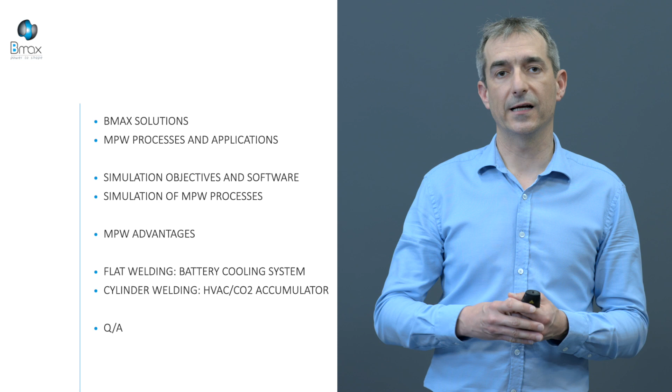We conclude with detailed case studies. The first one is for a battery cooling system, it's a flat welding, and the second one is cylinder welding for HVAC applications.

Bmax has developed innovative processes and provides equipment and services using high pulse power, HPP, for industrial applications. Basically, the product of Bmax is a pulse power generator. This generator can be plugged into several devices, a coil or electrode system in water, to perform any industrial manufacturing applications like forming, welding, assembling, and calibrating. In this webinar, we'll speak about only welding.

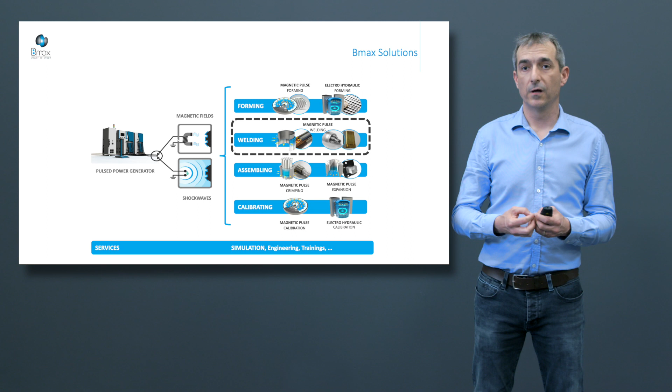There are two business cases at Bmax. The first is to produce a component or assembly, and the second is to deliver an HPP system. To complete its offer, Bmax has services including training, engineering, and simulation. The Bmax solution has a very small environmental footprint. They are compact, ultra-low energy consumption, there is no chemical emission and no heating, and it's quick and repeatable.

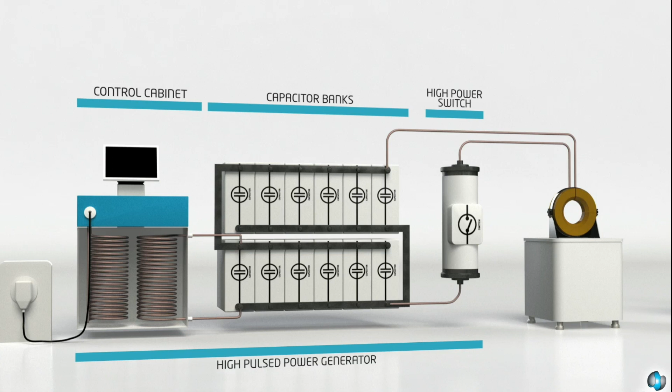Now, a presentation of an MPW system. There is a high pulse power generator, including a control cabinet, a capacitor bank, and a trigger named a switch. We plug this generator onto the coil. It's the final stage of the system.

In this coil, we put the workpiece, a tube and a cap in this case. Thanks to the control cabinet, we manage the energy level, the voltage for example, and we load the capacitor bank slowly with low power. Afterward, we release all this electrical energy thanks to the switch. We deliver this energy very fast into the coil. The current goes through the coil and creates a magnetic field.

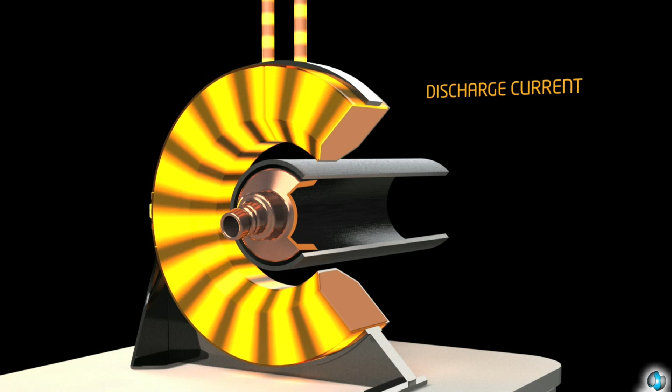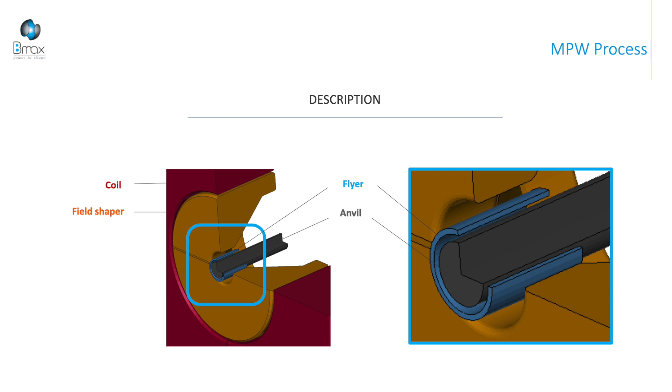To be clear in the explanation, I have to introduce a few definitions: the coil, the flyer, and the anvil first. The coil is plugged directly to the generator. It's the electrical device which carries the discharge current from the generator. It's the inductor, and we create Lorentz force on the flyer.

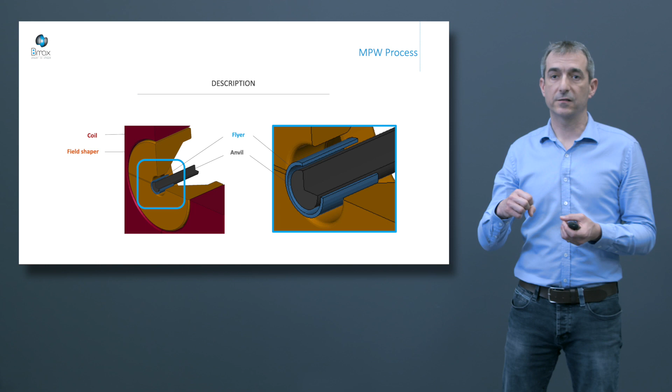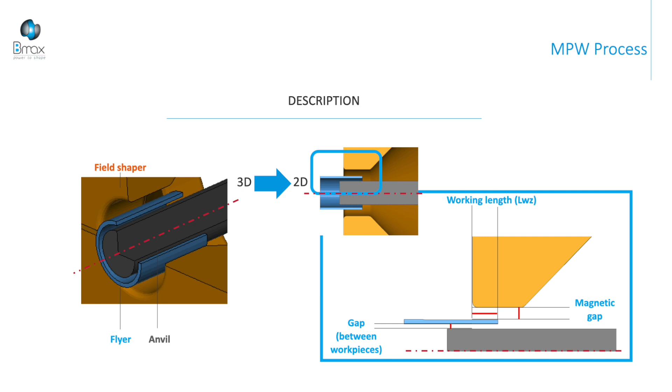It's a workpiece with a moving part, and this flyer impacts a target, and this target is the anvil or the parent part. From the 3D CAD model, we can perform a cutting view and a 2D section. In this 2D section, we can analyze three critical, more important parameters: the working length, which is the overlap between the coil and the flyer; the magnetic gap, which is the clearance between the coil and the flyer; and the gap, which is the clearance between all the workpieces, flyer and parent part.

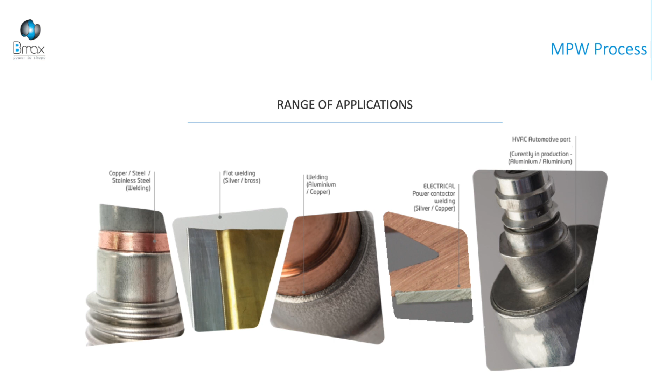The range of applications at Bmax is quite large. We can address automotive, energy, and aerospace applications. In automotive, we can work on HVAC, drive shafts, and filters. We are able to weld complex shapes and dissimilar materials like aluminum and copper, aluminum and steel, silver and copper, and so on.

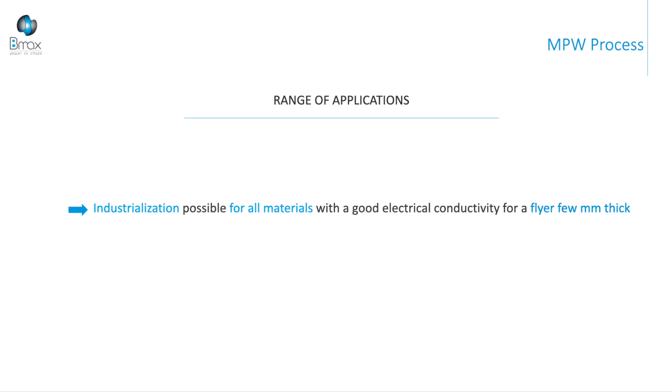The industrialization of MPW is easier for all materials if the flyer is a good electrical conductor and a few millimeters thick. It's a good condition to develop an industrialized system easily.

Simulations. It's a complex process. That's why we use simulation. The first objective of simulation is to understand physics, understand what happened, and to perform any sensitivity studies. The second point is to design and optimize components and processes. By this way, we're able to save time and cost compared with development of a brand new prototype, for example.

We use LS-DYNA software. It's a commercial code, and we developed a lot of special capabilities for data processing and user subroutines to address the specifically MPW processes. We have a service of simulations, and you can take a look on the first webinar. It's an overview of simulation capabilities and applications, and how we use simulation for all the Bmax processes. And it's a uniqueness in Bmax: material characterization, data processing, expertise in HPP, in forming, and in simulations.

How we use simulations to address MPW processes. All processes in Bmax are dynamic and multiphysics. Dynamic because all the process is done in few microseconds. And multiphysics because all the process consists of converting electrical energy into mechanical energy. For magnetic pulse applications, crimping, welding, or forming, we use a coil to create Lorentz force. So in the simulation software, we have to activate special capability, and we have to be dynamic and multiphysics.

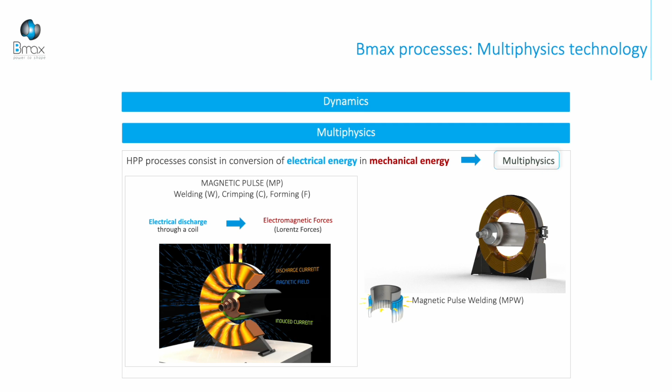Basically, we perform a coupling between the mechanical solver, which calculates stress, strain, and the displacement in the conductor in dynamics, and we plug this solver with the electromagnetic module, which updates all the electromagnetic field, like magnetic field, electric field, and the current density, and the Lorentz force at the end. And this Lorentz force is directly used by the mechanical solver to calculate accurately the loading.

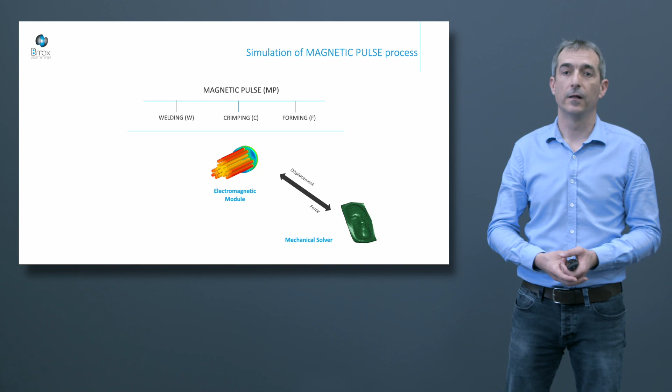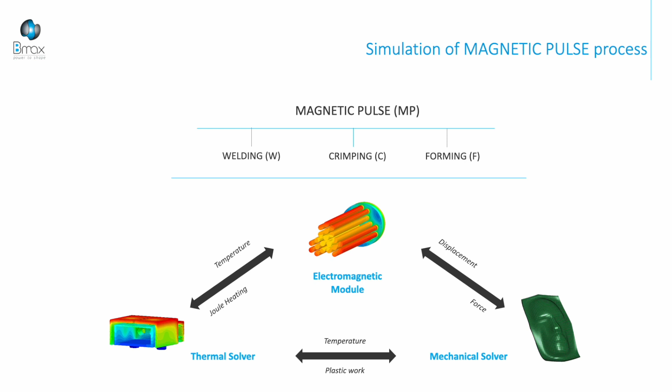In the metallic part, when we have a current induced, for example, we create heating. And we have to perform a coupling between the thermal solver and the electromagnetic module, for example, to update the electrical conductivity. Because when the temperature increases, we have a decreasing of the Lorentz force and the efficiency of the process. That's why we perform these three couplings between the three solvers.

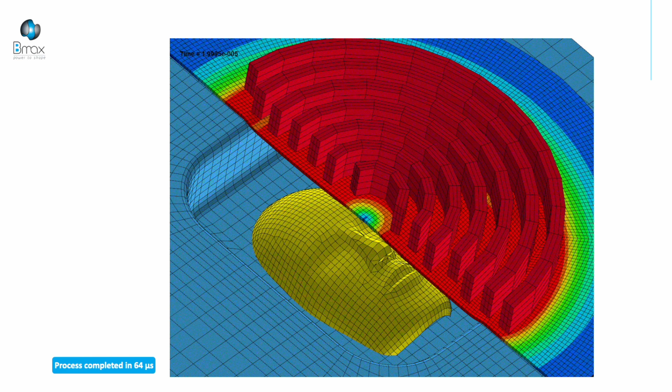In this example, we applied the pulse current directly on the coil, the red component on the screen, and the coil creates a magnetic field and pushes the flat blank to the bottom of the die. The fringe, the color, represents the maximum of Lorentz force. All the process is done in 64 microseconds. As you can see, the maximum of Lorentz force depends on space and time. That's why we perform this kind of coupling between all these solvers.

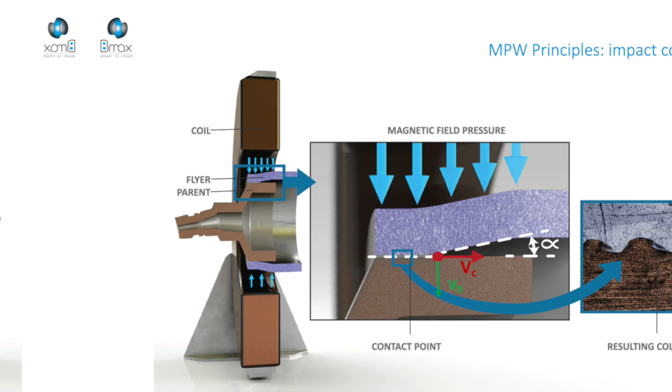MPW principles. In history, we defined the welding window for explosive welding applications. We use two main parameters: the angle at the impact and the contact closing velocity. The angle is defined by the clearance between the two components, and the contact closing speed depends on the explosive material properties. The sound speed of detonation is constant, and it's exactly this speed.

In magnetic pulse applications, in magnetic pulse welding, this velocity is not constant. That's why we use the component of the speed normal to the interface, to the contact surface, VR, shown in green on this screen. By this way, we are able to define magnetic welding windows, the condition required to expect welding. The drawing represents these parameters: angle, speed, and normal speed to the interface.

The first limit is the yellow straight line. We have to reach high speed to activate hydrodynamic behavior in the material. After this limit, when we reach this speed, we create high pressure, and this pressure is predominant, and the material behaves like a fluid. Thermodynamically, in terms of pressure and temperature, it's solid, in the solid state, but the hydrodynamic behavior consists of having fluid behavior. So it's the first limit of the welding window.

The second limit is the sound speed in the materials. It's a green line. If the contact closing is too fast, we create a shock wave in the material, and the bounce back and the effect of this shock wave can destroy the welding. Even if we have a good pressure and temperature to create welding, we can destroy it due to the bounce back and the reflection of shock waves. It's the second boundary of the welding window.

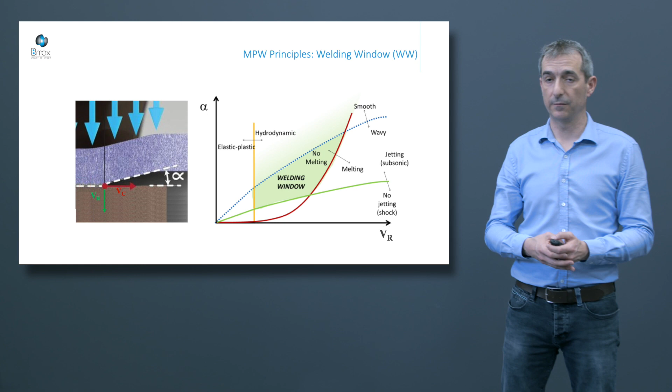The third limit is the melting temperature. When we have the speed between the velocity at impact, we can define the pressure and the temperature, and we have to be sure the temperature doesn't reach the melting temperature. If we reach this temperature, we have fusion and we change the phase, and it's not solid anymore, it becomes liquid. So this third line describes the theoretical welding window.

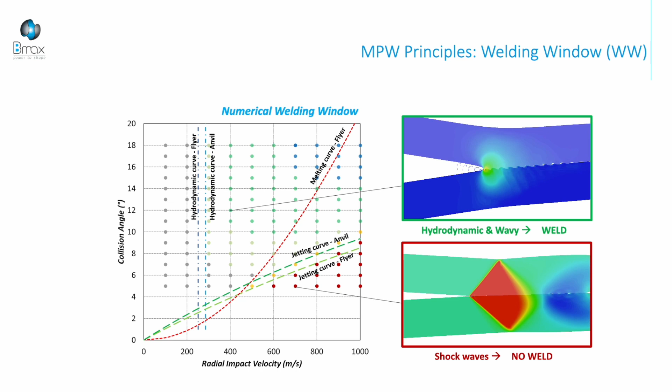In Bmax, we create a new welding window, a numerical welding window, more accurate. We perform 2D simulation in plane strain, and we follow the contact collision for several configurations in terms of angle and impact velocity. The blue and green points are good conditions to expect welding, and the red point is when the contact closing is too fast, with a speed higher than the sound speed in the material.

As you can see, we create a shock wave, and due to the reflection of this shock wave, at the bottom of the screen we have a blue spot, and this blue spot destroys the welding. So, thanks to this welding window definition, we're able to describe accurately the good conditions to expect a welding.

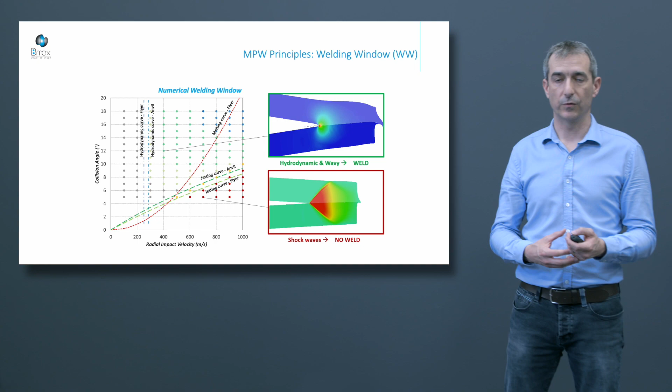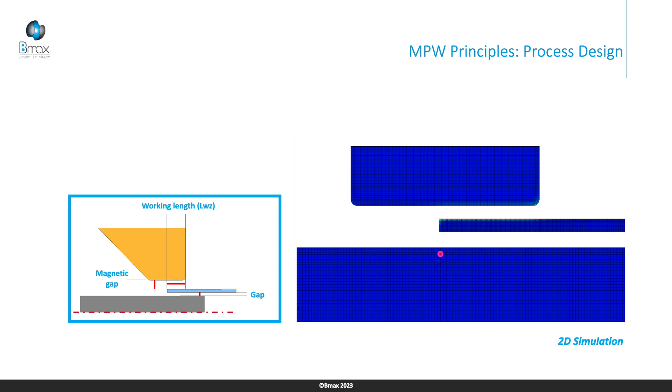After, in terms of simulation, we perform 2D simulations. You can identify the 3 critical parameters: the working length, the magnetic gap, and the gap between the workpieces. During the simulation, we track for each node at the interface the angle and the speed. This way, we can project this data on the welding window and analyze what happened during the process as a function of these 3 parameters.

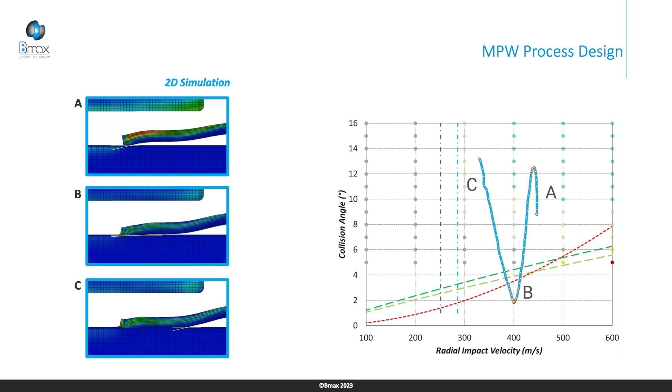As you can see at point A, we have a very high angle and a good speed. We are in the middle of the welding window. After, during the process, we have a flat impact, so for a good velocity the angle decreases and re-increases afterward. At point B, we are out of the welding window, and at C we have a large angle at the end of the process, and we are again in the welding window. So according to this analysis, we can say we have an issue maybe at point B.

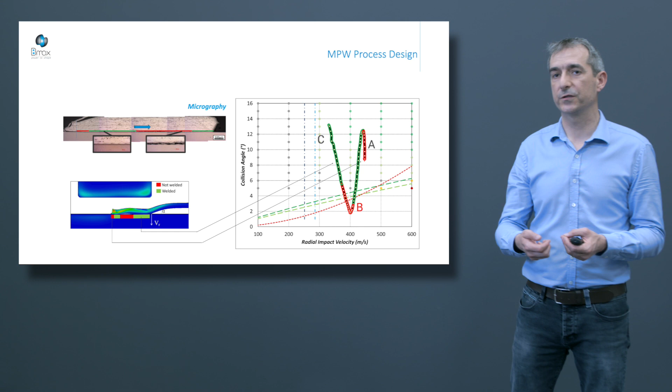After, in the process, we have a decrease of the angle and we go out of the welding window. We are at point B, and at this point we have no welding, as expected. After, the angle at the end of the process increases again, and we are at point C. We have a good welding at this point.

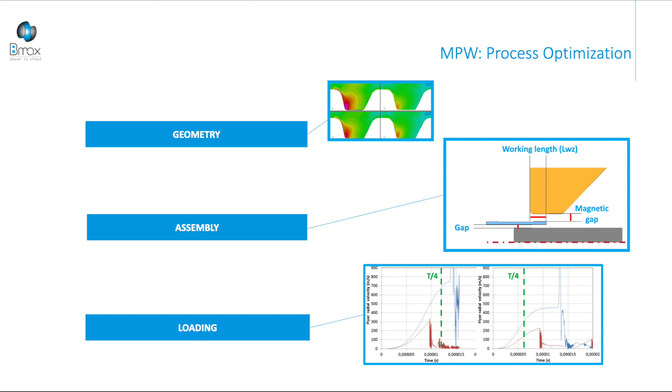So by simulation, we can optimize any parameters like geometry, assemblies, and loadings to enhance this result. Regarding the geometry, we can optimize the coil section, for example, to increase the current density and the Lorentz force applied locally on the flyer. We can also change the parent part geometry to maximize or to change the angle at impact.

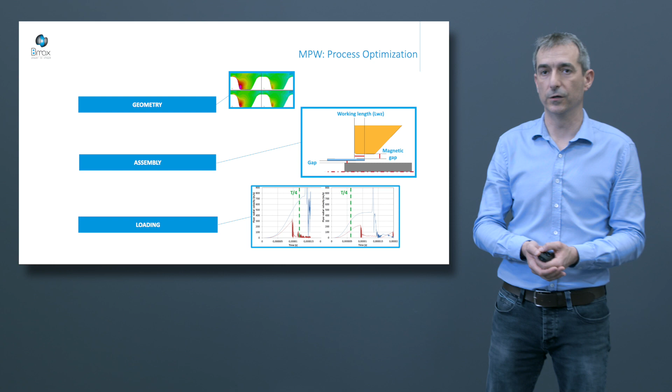The second point to optimize is the assembly - again the working length and the gap between the components. At the end, we can optimize the loading in terms of maximum current, the energy level if you want, and the frequency. If the loading is too long, we have the maximum force after the impact, so we don't create a very high impact velocity. If the loading is too fast, we don't push during the process, so it's not a good configuration to optimize the welding. By simulation, we can change these parameters to define an optimized configuration and enhance the welding.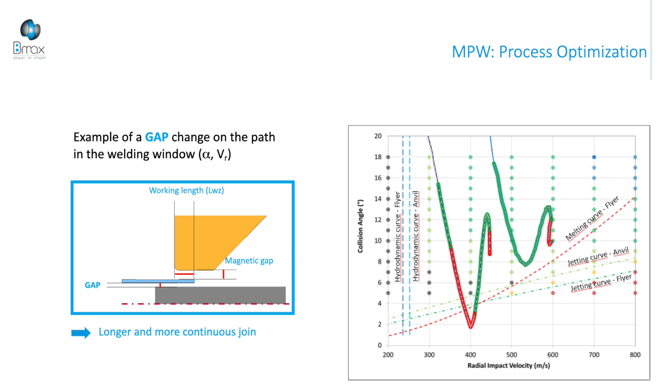In this case, we change just the gap between the flyer and the parent part, and by this way, as you can see, the new path is fully within the welding window. So this second configuration is better than the first one. We have a longer and more homogeneous welding in this case.

Now we'll speak about the advantages of this process. Basically, MPW system is very high performance because we are able to weld at the solid state dissimilar materials with a high-speed collision between the two metals, possibly dissimilar, at room temperature with high repeatability. So the main advantage of MPW is to be fast, to be able to weld dissimilar materials with high performance, with no heat-affected zone, and for complex shapes.

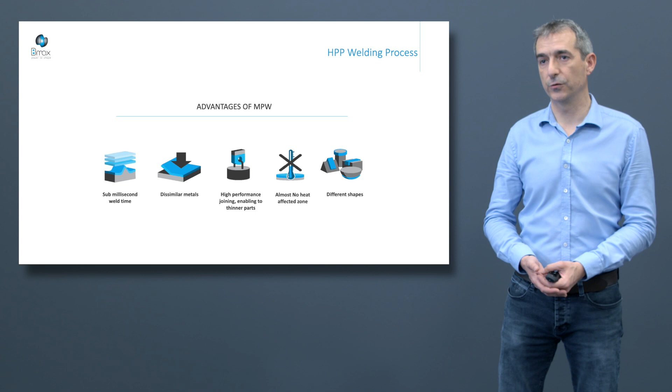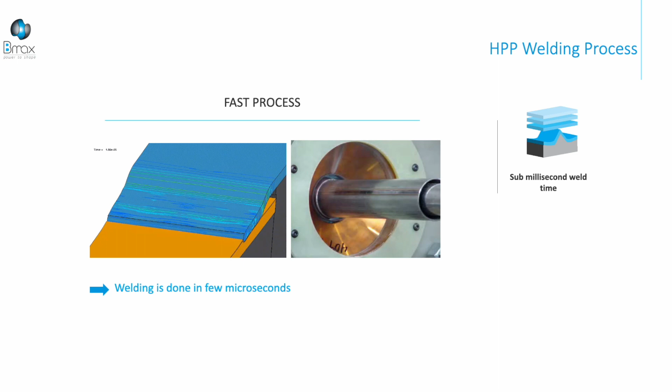It's a fast process. As I said before, the whole process is done in a few microseconds. On the right, we have the speed of the process in the real world, and on the left, it's what happens in simulation. We can analyze slowly what happens during the whole process at the impact to track angle and velocity, and to identify potential issues before the prototype.

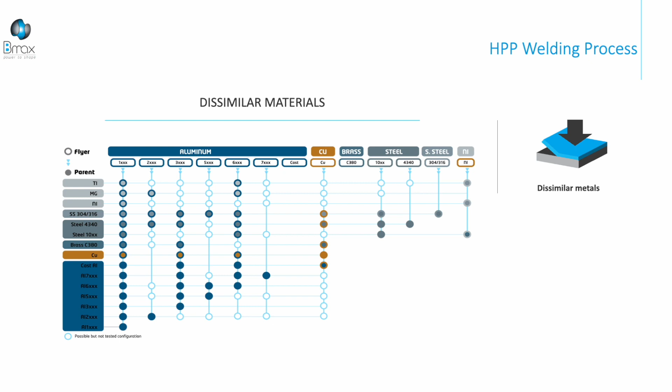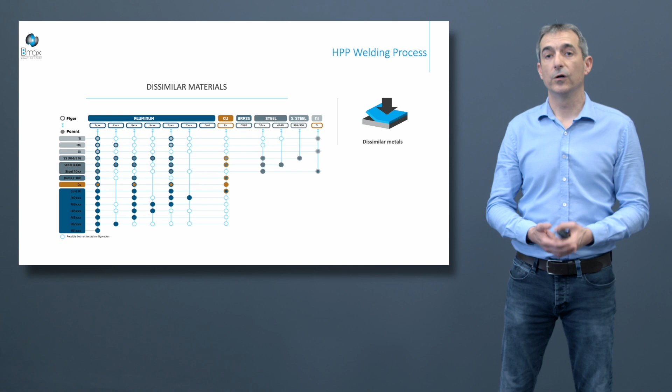After that, we are able to weld dissimilar materials. In this matrix, it's a simple summary of combinations of metals we are able to weld or not. Basically, the flyer has to be a good electrical conductor to maximize the efficiency of the system, which is why we usually use aluminum or copper. In terms of the parent part, the anvil, or the target if you want, we can use steel, copper, or aluminum. The range of materials is larger. High performance - we can plan any test to measure and evaluate the performance of the joint.

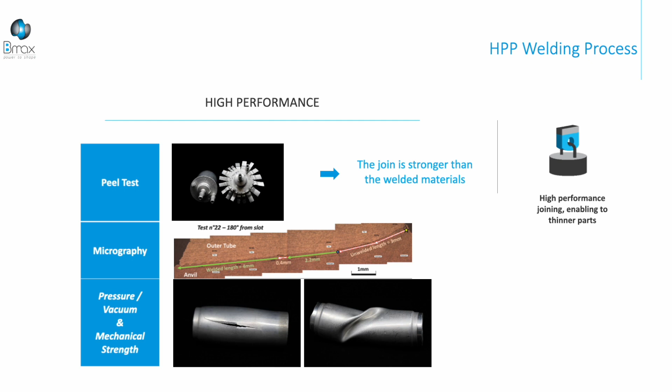For example, we perform peel test and micrography. Micrography is after the peel test. Peel test is to localize the welding and to test the strength of the joint. Micrography is to measure the welded zone, for example.

After, according to the functional requirement from the customer, we can perform any mechanical test: burst test, pressure, helium, hydrogen leakage, for example, or mechanical tests like torque or tensile test. Usually, the joint is stronger than the welded materials. We are not able to join end-to-end; we always have an overlap between the parent part and the flyer, for example.

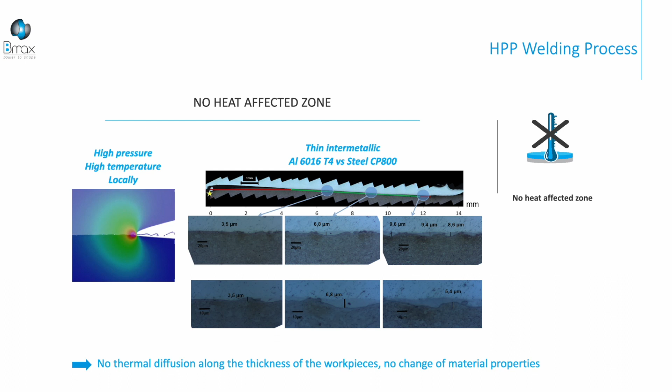No heat-affected zone. To perform magnetic pulse welding, we have to reach a very high velocity at impact. This way, we create very high pressure and high temperature very locally at the contact closing. These high temperature and high pressure generate good intermetallic bonding for dissimilar materials, very thin, just a few micrometers in thickness. This way, we have a strong welding. But the high temperature is very local, just a spot and very short in time.

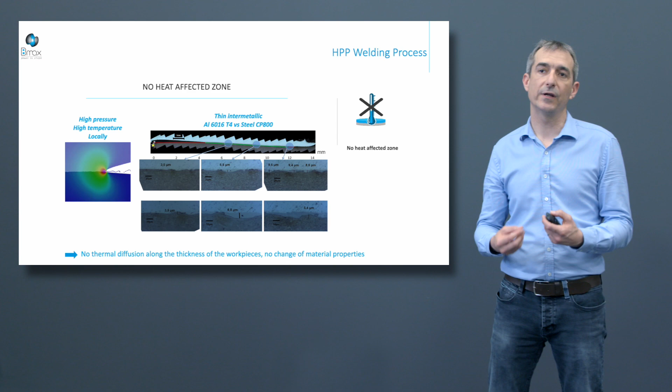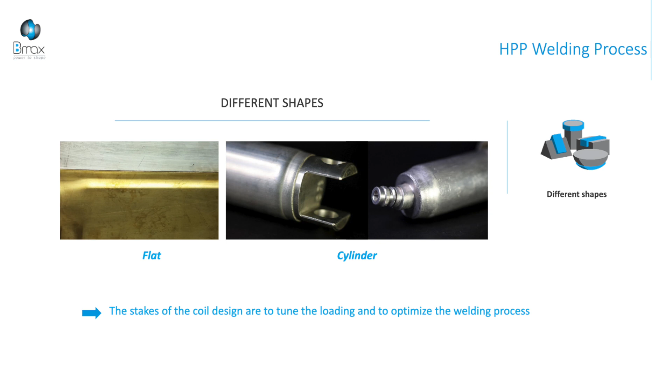This way, we have no thermal transfer or thermal diffusion in the component. So the temperature at the end is very low, and we don't change the mechanical properties of the materials. That's why we have no heat-affected zone. To conclude, the last advantage of the MPW process is that we can address different shapes. We are able to weld flat geometries, cylinder geometries, and complex shapes. The stakes of the coil design are to tune the loading and optimize the welding process.

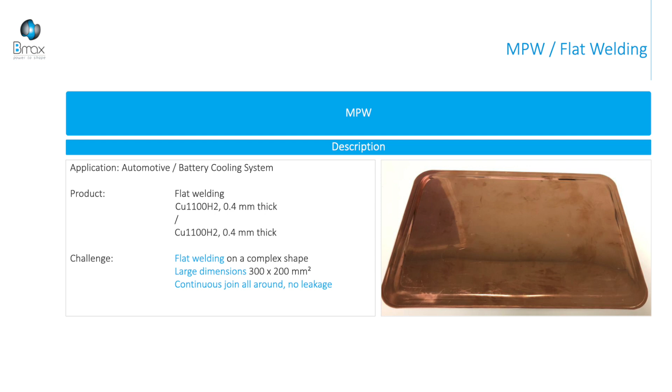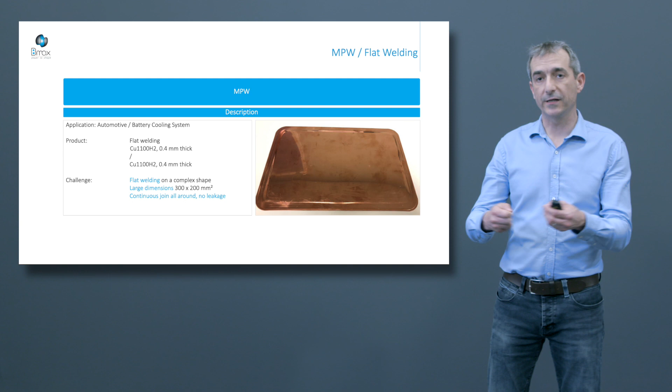Now I will present the first case study: battery cooling system. The process is a flat welding of two plates in copper alloy, 0.4 millimeter thick. It's a complex shape with corners and large dimensions. The requirement is to create a continuous joint all around with no leakage.

So, as usual, the material identification. Here it consists in defining the welding windows, theoretically and numerically, for this couple of materials, copper and copper. After, we perform 2D simulations, step one, which consists of using an existing system, an existing setup, to validate the welding windows. We perform micrography to check if the welding windows are respected.

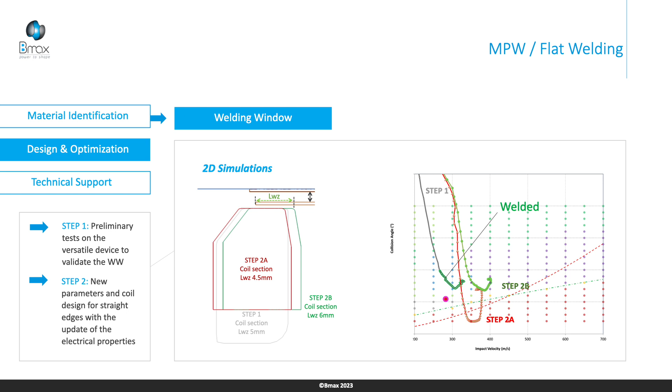As you can see, the green line shows the length of the welded zone, and we are in good compliance with what we expect. After, in step two, we define a coil section, step 2A in red. We define a coil section, but as in the previous example, we have a critical area.

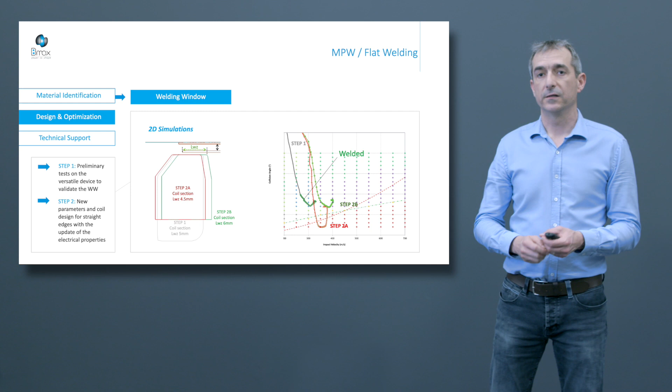The path in terms of speed and angle goes out of the welding windows. That's why we iterate, we change the coil section, the overlap between the workpieces, and by this way we optimize the process and the system with the coil section defined by the green area, named step 2B. After, thanks to these 2D simulations, we can calculate the temperature during the process.

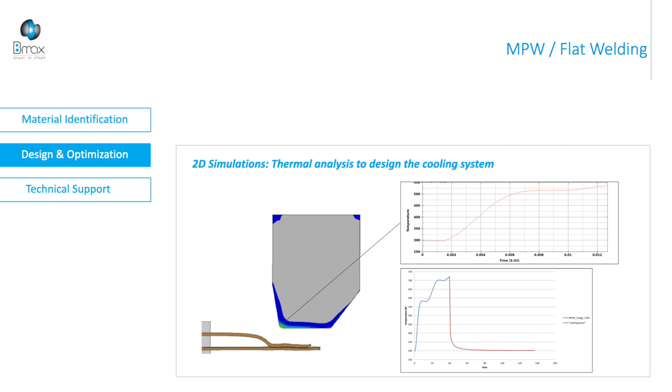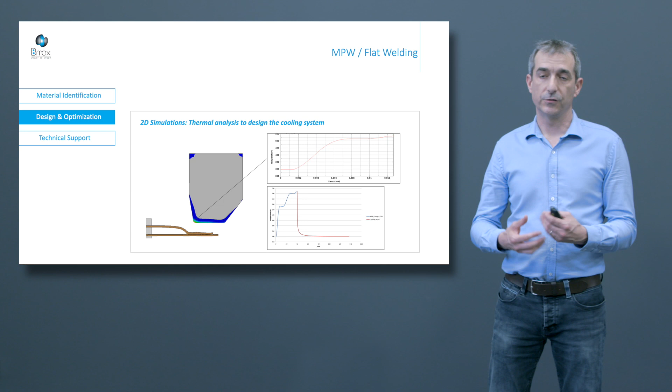We can estimate the maximum temperature in the coil in the active zone, and compare it with the melting point. We don't want to melt the coil, for sure. And for a lifetime analysis, we can estimate the temperature increase as a function of the production rate. This data is used again to optimize the cooling system for the system.

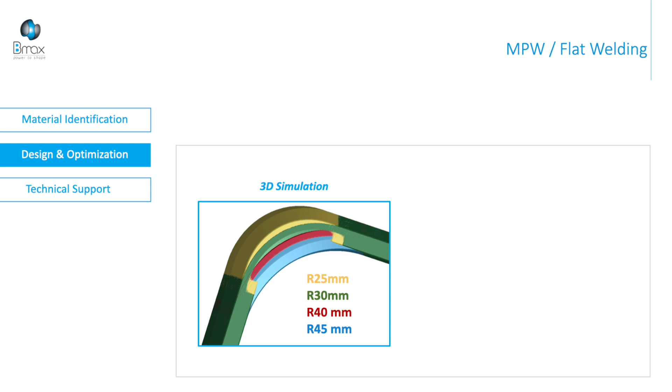After, we perform 3D simulation, for example, to optimize the coil in the corner. Here is an example where we iterate on the section radius. We studied 25, 30, 40, and 45 millimeters in radius, and we check all angles and velocities, projecting all these results in 3D in the welding windows.

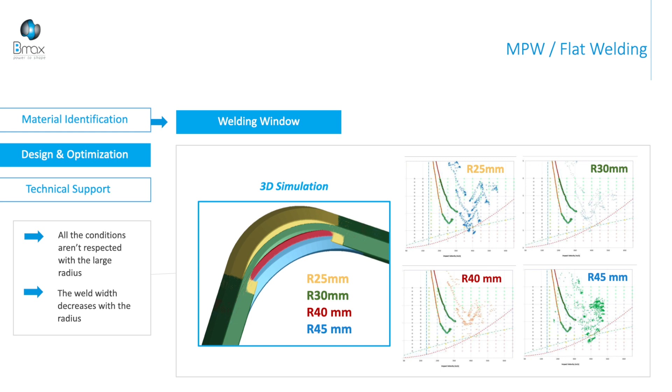In this case, when we have a large radius, we have low performance in terms of welding, and for a small radius, the smallest radius creates a very small welded length. That's why the optimum is around 35 millimeters in radius.

After, thanks to the 3D simulation, we can optimize the slot. The slot is in the coil where the current goes in and out. This current path disturbs the magnetic field, so by this way, we change the angle and velocity at impact. So we use 3D simulation to check if we are again in the welding windows.

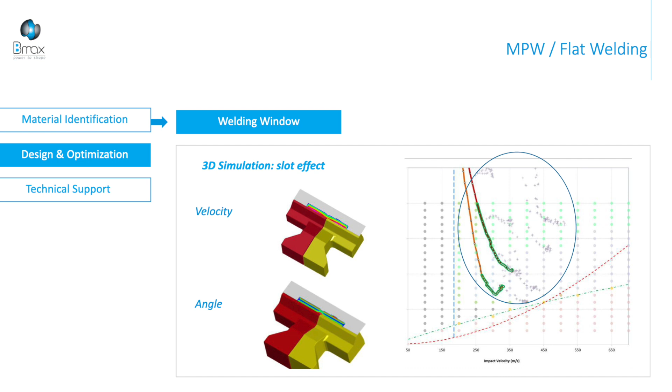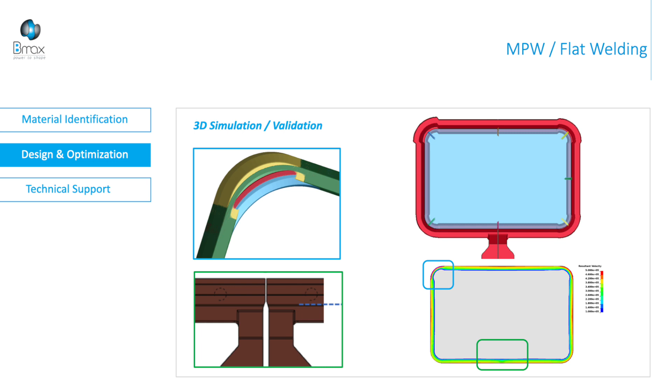It is the case with this final design. After, we validate all the design, all the CAD file, the corner and the slot, with a full model of the system. And we check, as usual, the angle and velocity all around the product.

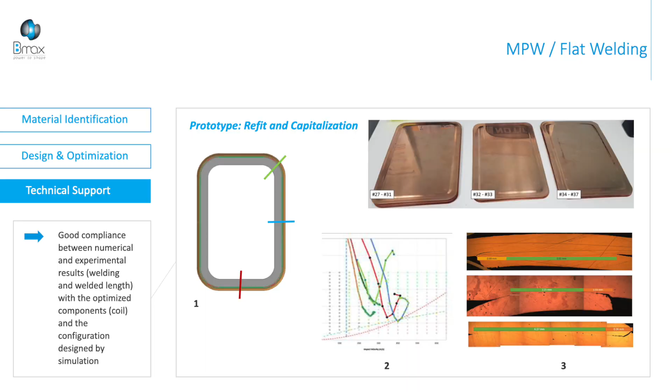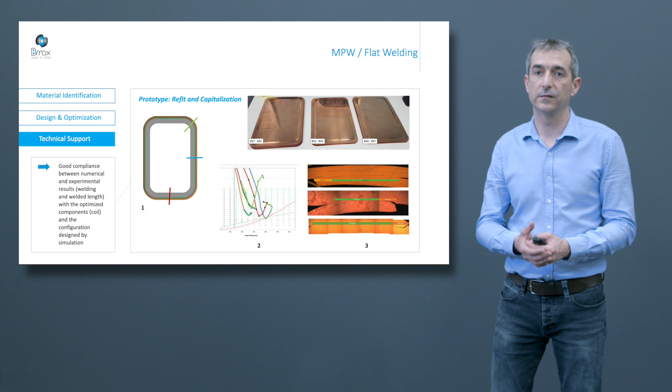After, the last stage consists of performing a refit and support to the experimental test campaign. And we can compare the numerical and experimental results. We have good compliance in this case. With micrography, we can check the welded length, and project it on the welding windows, and understand what happened. It's exactly what we expected.

The second case study is about an HVAC production system. Bmax proposes an advanced MPW solution to design and optimize components and processes to maximize efficiency and minimize the scrap rate. Here, the product is a CO2 accumulator.

It consists of a tube with two caps. The flyer is the tube, and the parent parts are the two caps. So it's one assembly with welding to do. The aluminium is a 6082 temper T6, and the flyer has a thickness of 3.1 millimeters.

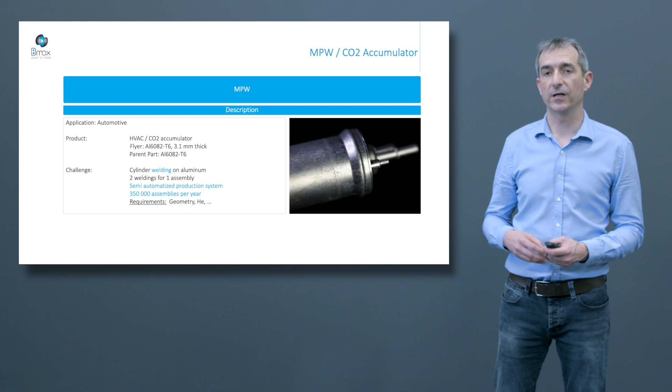The project consists of designing a semi-automatized production system able to produce 350,000 assemblies per year. The requirements are about geometry, helium leakage, and specific functional requirements about cycling.

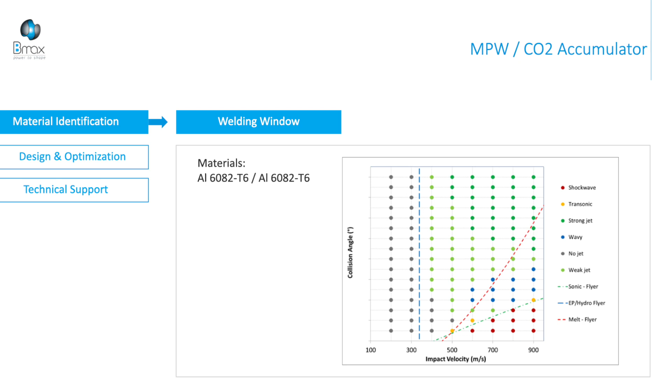First of all, we define the welding windows for this aluminium 6082 T6 on itself, numerically and theoretically. After that, we perform 2D simulations.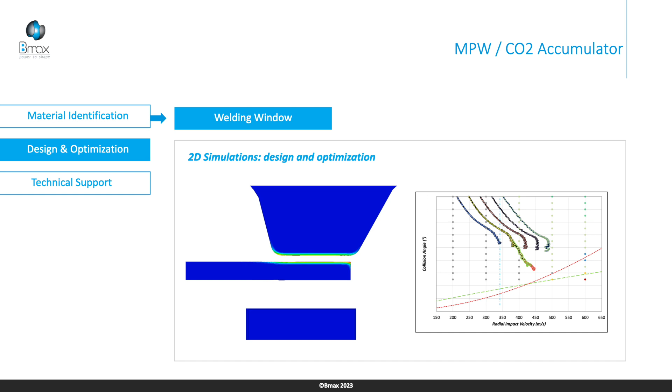After, we design a new coil section for this application, especially for this product. In this case, we have an optimization of the loading of the voltage, which is the energy level. As you can see, for each voltage, we have a new curve.

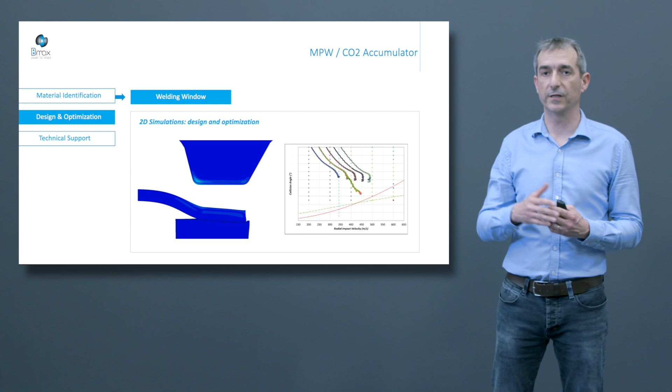The next step consists of optimizing the coil section. Again, we can compare this result with the existing setup. Thanks to this simulation, we are sure we can have a better configuration compared with the existing setup.

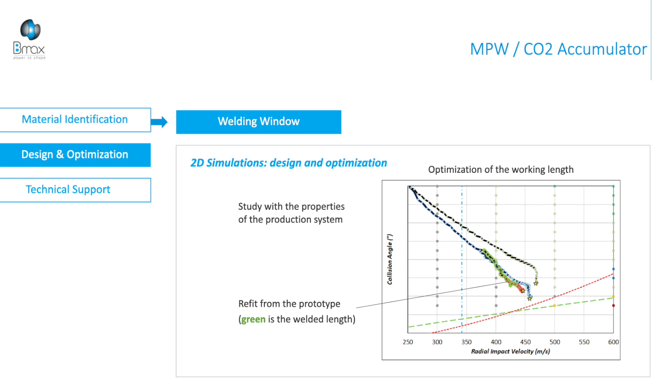So after, the next step consists of performing a 3D simulation to check if we are in good condition at the slot area.

Again, the slot area is where the current goes in and out. This path of the current disturbs the magnetic field and the Lorentz force. As you can see in the drawing, the maximum Lorentz force decreased by 15%.

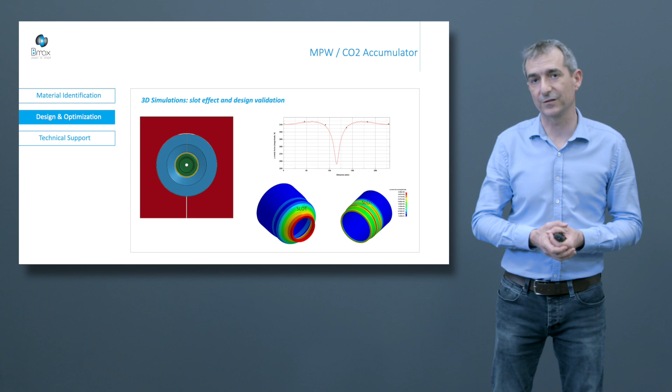So by 3D simulation, we check speed and angle to project this data onto the welding windows. In this case, we validate the welding windows, so we are sure in the slot area we are able to weld.

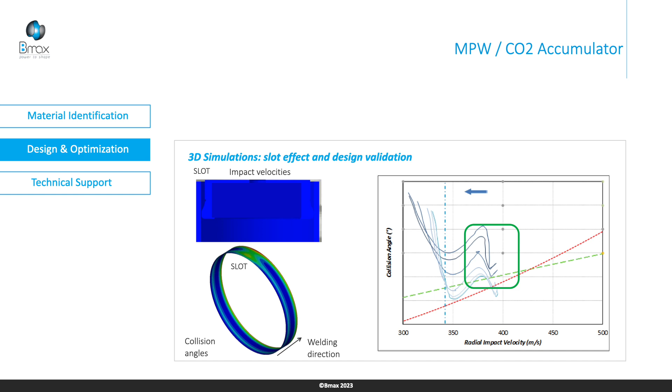So thanks to the simulation, we are able to say this coil and this HPP configuration is able to create continuous welding all around the tube. Then, thanks to simulation and temperature analysis, we can design the cooling system.

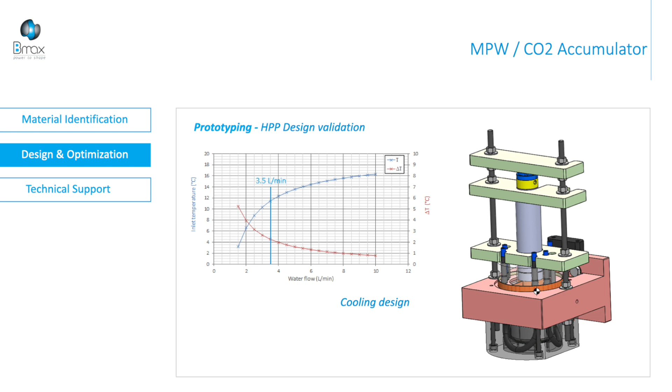Thanks to simulation, we can calculate the temperature increase during one shot, and we can calculate the temperature during the production phase, according to the production rate.

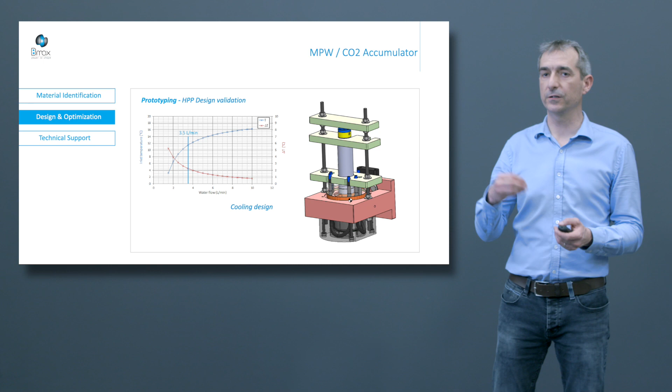So thanks to the simulation, we can say with a water unit able to deliver 3.5 liters per minute, we need a water inlet temperature of 12 degrees, and the temperature increase by the cooling system is only a few degrees. So thanks to the simulation, we validate the HPP configuration and design the cooling system.

The next step is to build the prototype and realize the first tests. With the first assemblies, we can check the geometry, the geometrical KPIs, key performance indicators. We can perform peel tests and analyze by micrography the length of the welded area.

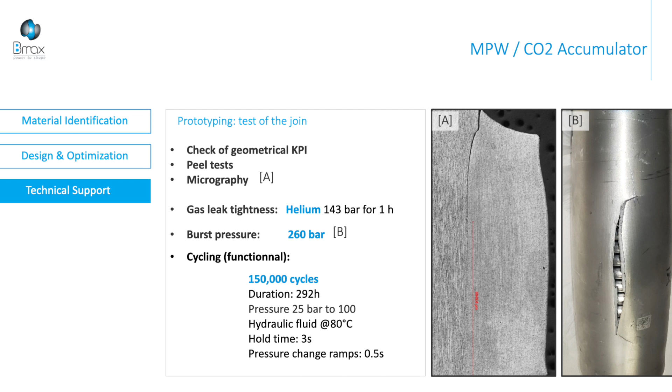After, the customers check the helium leakage: 143 bars during 1 hour. It performs a burst pressure test at 260 bars. And for the functional requirement about cycling, it performs 150,000 cycles during 292 hours.

So after the validation of all these assemblies, the next step is to design the production system: to design the workflow, to validate the production rate, to design the monitoring, validate the cycling and lifetime of components, to check the repeatability and capability of the system, and to define the maintenance program.

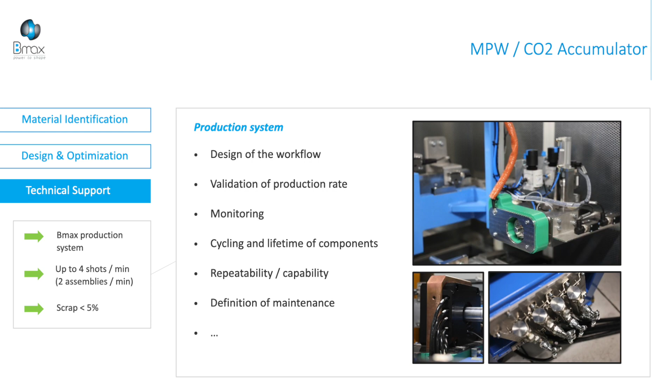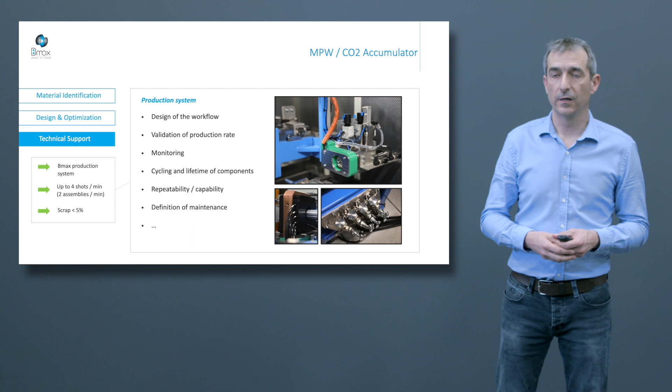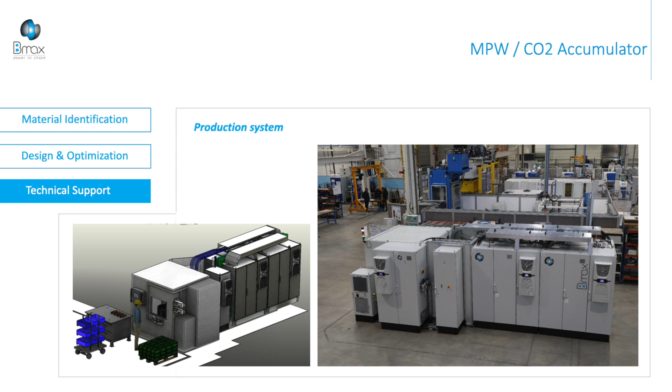So at the end, we are able to deliver a production system with a production rate of 2 assemblies per minute, 4 weldings per minute, with a scrap rate less than 5%. Here is a CAD file of the full system as designed, and the real system in the workshop, ready to go to the customer plant.

In conclusion, regarding MPW processes, Bmax can produce assemblies or deliver industrial systems, standalone or fully integrated in a production line. Thanks to simulation and specific capabilities developed internally at Bmax, like Welding Window, we save time and cost to define the best condition to weld, to limit the prototype phase, and to reduce the lead time for production.